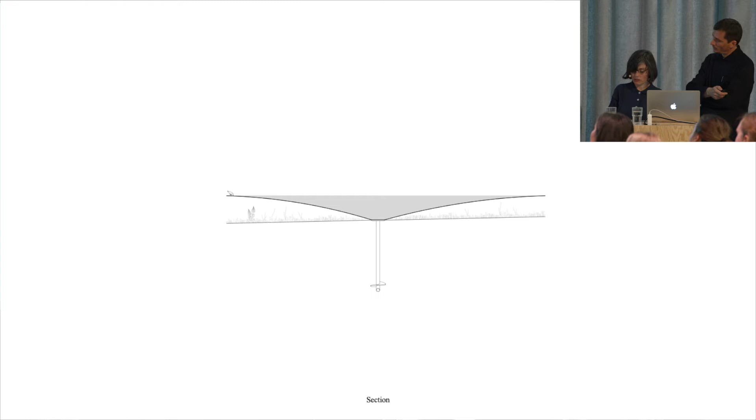We wanted it to be somewhere surrounded by mature trees in the proximity of a path, in an intimate place away from the crowds in the gardens. It should be something one discovers within nature. We wanted the ground to be modified as little as possible, with minimal clearance of plants, leaves, or other organic materials. The intention was to minimize the impact on the site in order to strengthen the relationship of the artificial object with the natural surrounding context.

The form of the basin is a kind of complex double curvature surface, but essentially it's an inverted truncated cone with a circular bottom plane of about 18 centimeters at the base, and an irregular top that varies between 4 and 4.5 meters.

The geometry in plan was determined by its center, which we see here in this plan. So in order to determine the geometry, we divided the shape into 20 sections with a common center and a specific length of varying length. We created a series of arcs that then went to create the whole form.

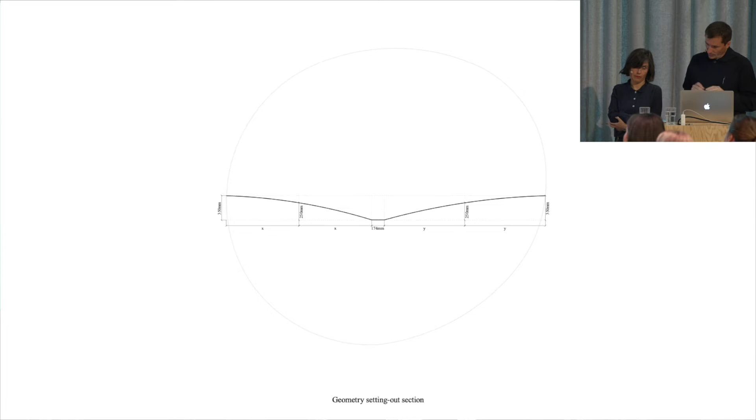It was built, fabricated in the local workshop in Grand Métis. Essentially, what we built was an inverted concave mold, constructed using simple 18 millimeter thick plywood. Then we cut the 20 sections, arranged on a polar array every 18 degrees. Sections of plywood went to bridge the different forms, creating a surface which is this inverted cone.

The mold was then filled and sanded down to a smooth finish, and the basin was cast as a fiberglass single seamless piece. In order to augment its reflective properties and minimize its presence as an object, the entire basin is matte black with pigment integrated directly into the fiberglass. We wanted the blackness to be deep and solid, something we could not achieve with an application of a layer of paint. We wanted the material to be black in its core.

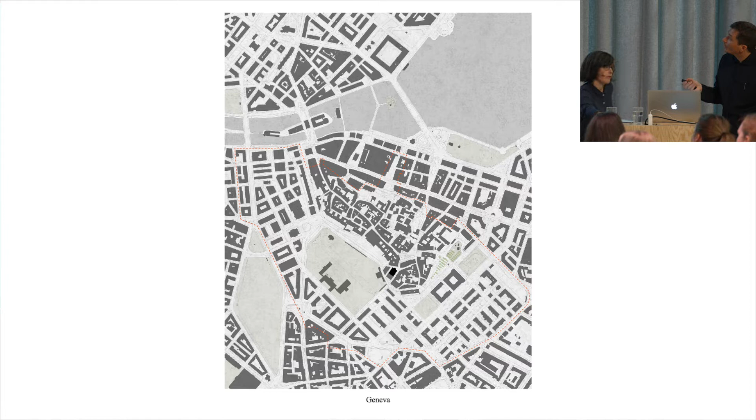It's this darker dot, on the edge of the historic city of Geneva. Another thing we marked in this plan: the red line highlights the heritage protection zone affecting both the historic city and its environs.

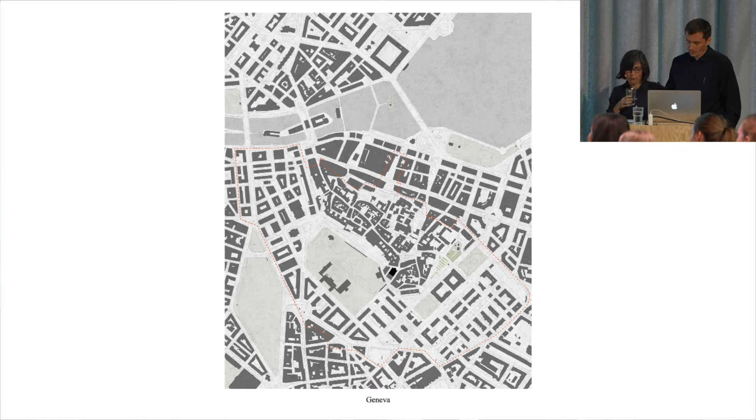So the Ancien Manège is located here at the edge of the city, and in one of the historic entrances to the medieval town.

The building was originally built between 1828 and 1829 as an initiative by the government of the time, and it was built by an architect called François Breuer, and its use was a municipal horse riding hall, mostly used by the military forces.

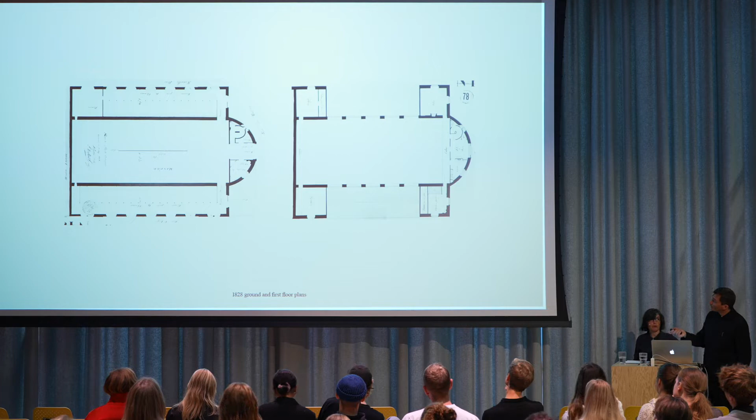So the composition of the building followed what was the canon for military buildings of the early 19th century. We have a covered arena at the center of the construction that is flanked by 2 wings of stables. And then we have this quite singular semicircular rotunda that at the time determined the main entrance to the building and housed a series of services for the building. And then this volume kind of completes the central volume of the horse riding arena.

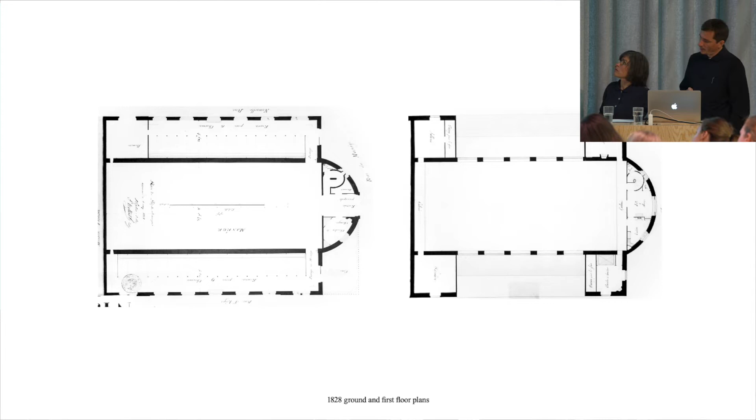Then we see more on the first floor plan. The 4 corners of the building are defined by 4 towers that housed secondary spaces and define the corners of the building.

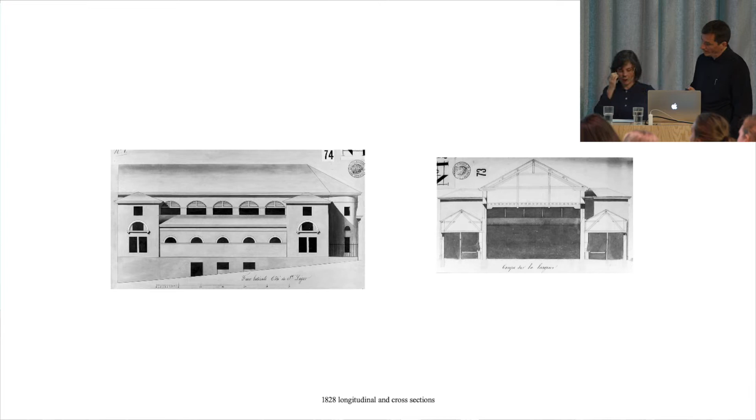Then in the section is quite interesting because we see that the difference in height between the horse riding hall and the stables allowed for natural light and ventilation to enter the central space. And then also these allowed to ventilate a huge loft structure that was used to house the hay for the horses. So those are sections of the building in its original configuration of the 19th century.

But following the increase of the popularity of the car at the time, and the rejection of equestrian activity in the city center, in the 1930s it was first transformed into a garage. At the time it was already called the garage of Bourg-de-Four, in the historic city, and this apparently was the first pump station for petrol in the city.

To further augment the capacity as a parking for vehicles, the building was considerably transformed in the 1950s, following a project by the architect Jean Camoletti. The introduction of 2 reinforced concrete slabs completely modified the composition of the building.

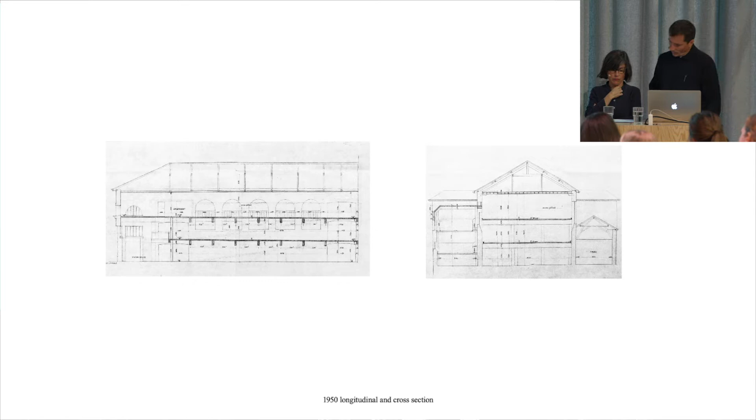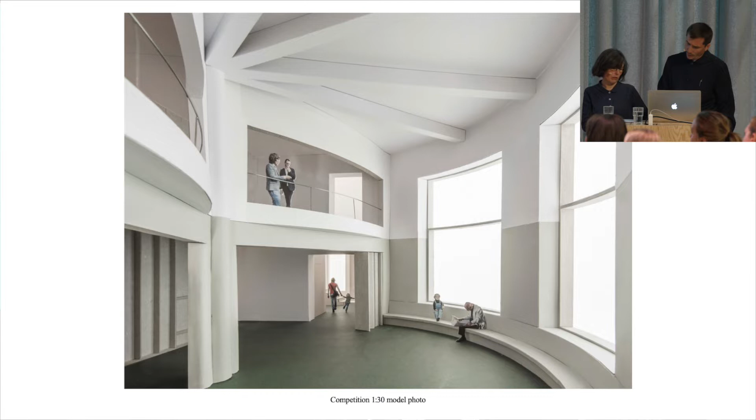This is one of the early competition images for the creche, which was one of parts of the program, a toy library, spaces for the neighborhood association, and also a large space that also became a school restaurant for nearby schools that needed this facility. So those were a series of images that our photographer Andres Fraga took at the time of the competition.

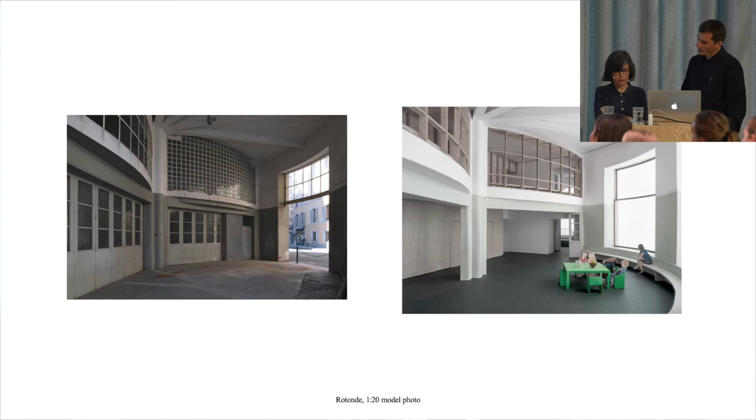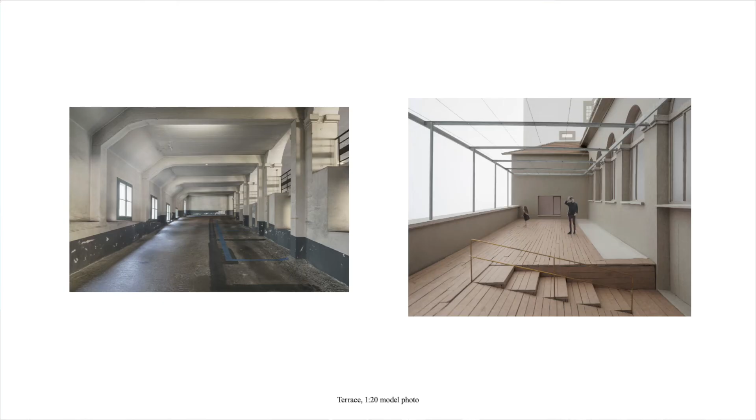So the project, the point of departure of the project is the comprehension of the spatial and construction configuration of the building as found, and assessing its potential to become an inhabitable building with minimum intervention and transformation. So the project proposes the reutilization and adjustment of existing structural and construction elements combined with selected demolitions and punctual repairs and minimum additions with the intention of utilizing the atmospheric, architectural and thermal qualities of the various parts of the building.

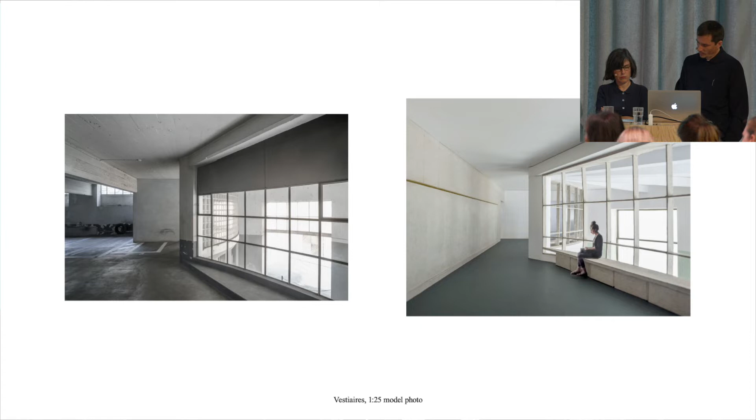Again, here is a series of model pictures in parallel to images before the commencement, the start of the work on site.

As part of the another important part of the project was to redefine the public space and to regain as well the exteriors of the building for the use of the people and pedestrians. The building now is accessed from the rue Julien Pichot via a new pavement that clarifies the urban block, establishing a visual relationship with the Bourg de Four, that is the space with the trees, a square in the old town, the main square in the old town, and the new public space in the proximity of the entrance with this fountain.

The main entrance hall for the public space is placed in one of these towers, Stefano was explaining, on the left side of the building, becoming a double height entrance space where the various construction periods coexist. This is a space that we did semi-external, and we didn't need to insulate, and that allows us to show the stone construction of the original building, the concrete qualities of the construction of the 50s, and then the 21st century interventions.

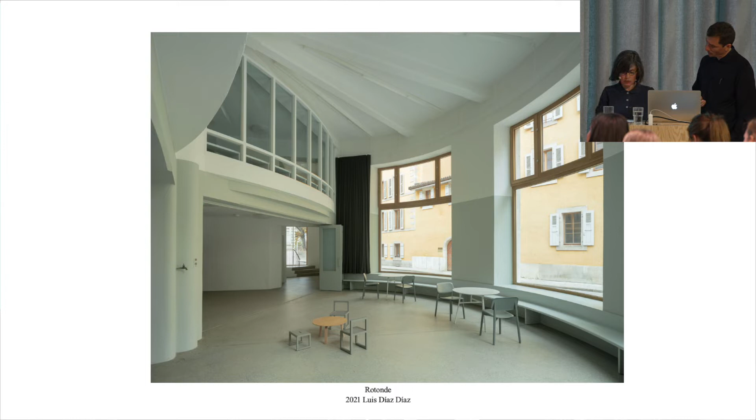Accessing the building from the towers allows for the semi-circular rotonde to become a living room, an urban living room in direct relation with the street, preserving again the 1950s concrete structure and balconies.

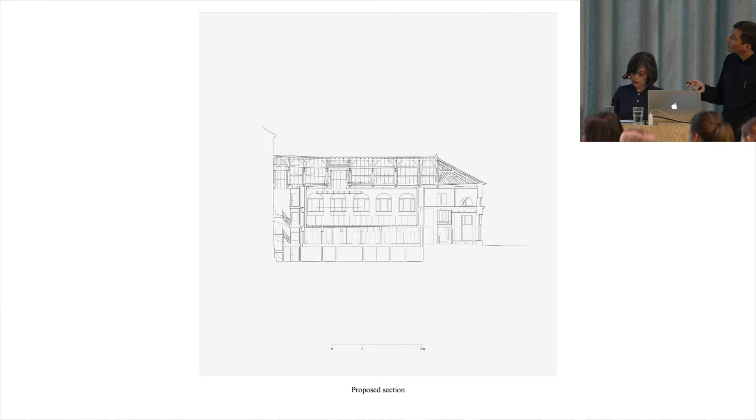The lower concrete slab is preserved, forming a service plinth where all the common services are placed, liberating from obstructions all the perimeter spaces with windows on the exterior.

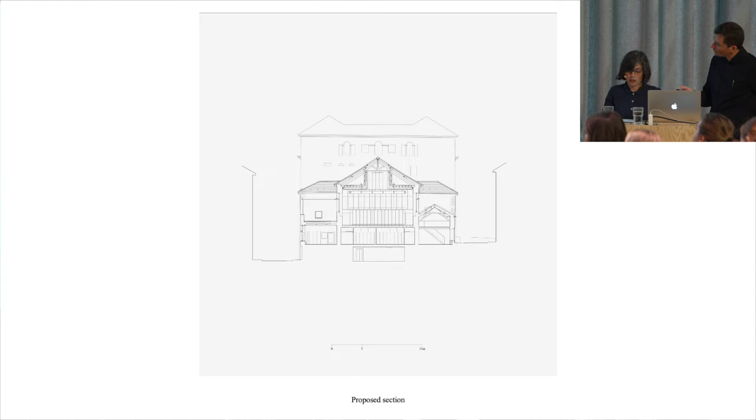The intermediate concrete slab is partially demolished to liberate the large openings and obtain a generous salle, also serviced from the service plinth.

All the new additions are realized, taking the form of partitions that define the large block of services on the ground floor and the two large partitions that acoustically exclude the salle from the rest of the building.

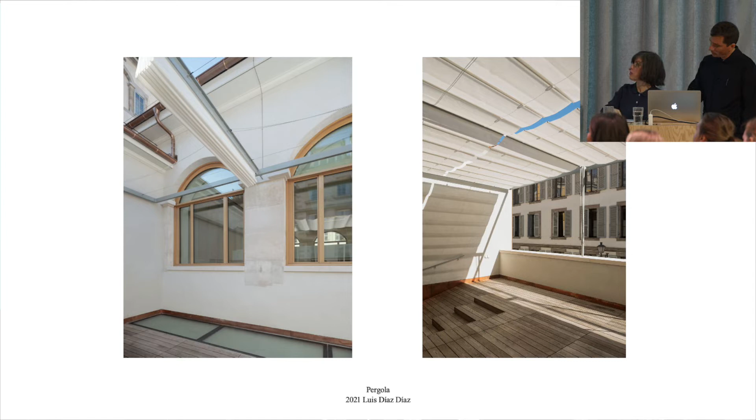The result of the demolition of the higher volume in Rue Saint-Léger allows us to do the only new structural addition, this new roof over the south wing that forms the crèche, and becomes a new terrace on the upper level, protected from direct sunlight by a pergola that also gives some protection into the interior of the salle.

In order for the salle to be occupied by multiple users simultaneously or used as one large room for special occasions, a suspended structure can be lowered or lifted to form a partially separated space within the salle.

This element is hung from the existing timber structure and lifted via a central skylight that also provides natural light and ventilation to the salle.

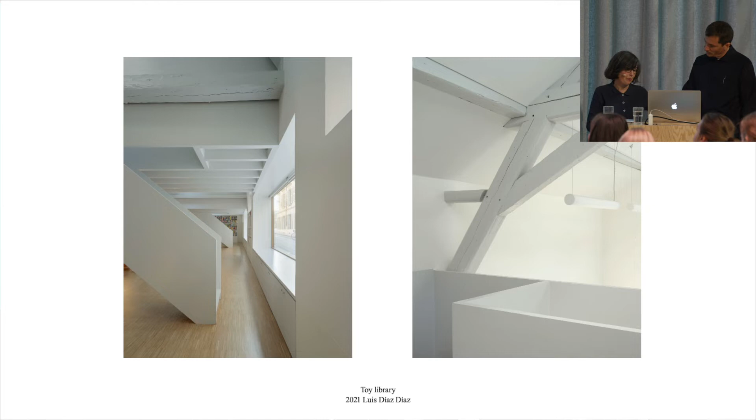So the project, one of the ambitions of the project was to try to make compatible the optimization of the thermal envelope of the building and the conservation of the original qualities of the structure.

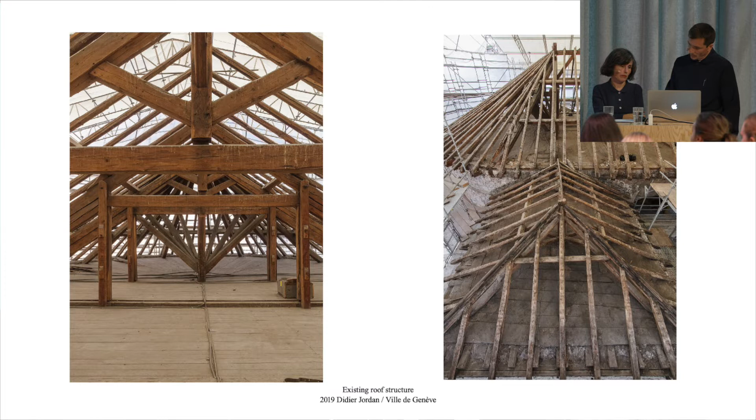In order to minimize the intervention into the existing timber structure of the roof, we maintained the insulation barrier below the structure, which allowed us to preserve and maintain the structure in its entirety without modifications.

New insertions in the building have different ways of dealing with the existing structure. There is a series of more stereotomic, mineral interventions, which we see in this case made with kind of Ytong insulating blocks, or on the right, carved stone, which these interventions go and complete and try to reassemble somehow the lost clarity of the existing building.

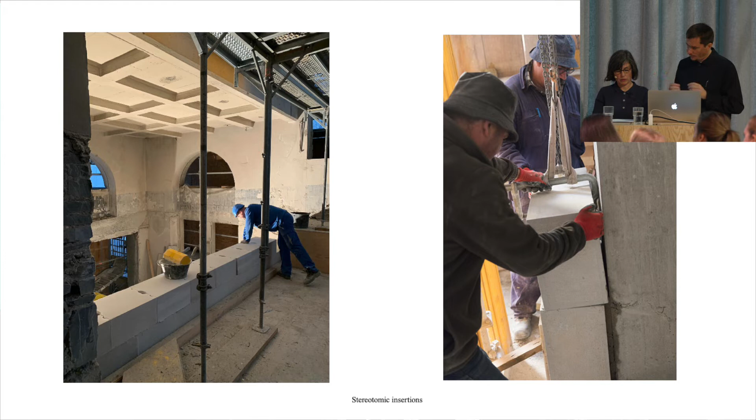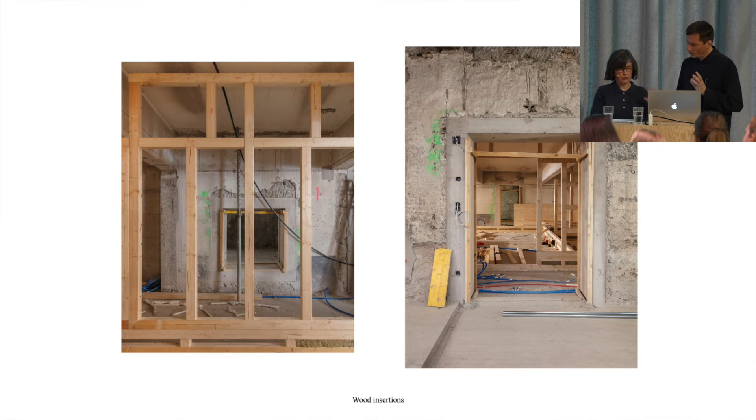Then there is another kind of layer, made out of wood, utilizing wood construction and a kind of light construction that is more related to the current use of the building, and an idea about possible modification in the future. So there is a kind of dichotomy between permanent and non-permanent interventions.

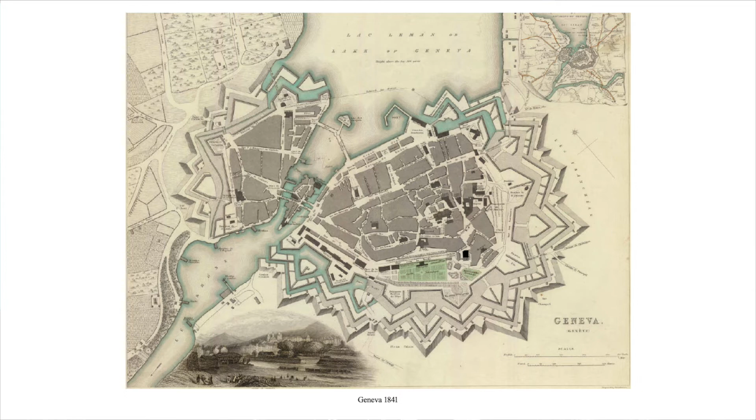In this plan of 1841, you can see the city of Geneva still fully enclosed by fortifications that only 10 years later started to be removed to give way to the 19th century expansion of the city. The Bastion Saint-Antoine is placed here, you can see the Manège was already built there, and the Bastion Saint-Antoine is on the east side of the historic city.

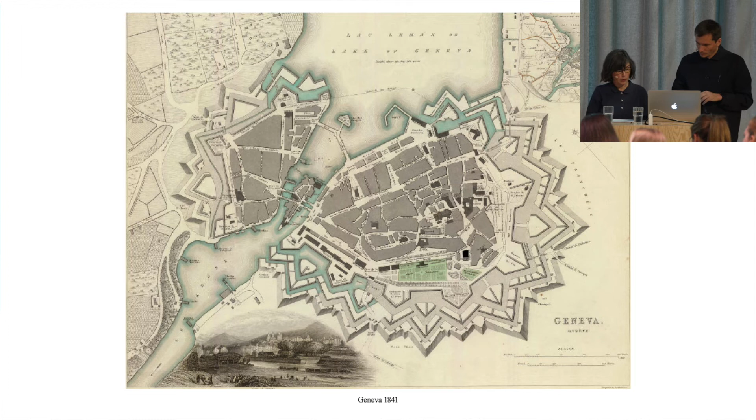In this print from 1841, earlier than the plan, you can see the city of Geneva, the view from the Bastion towards the lake in the background, and the fortifications still in place. It depicts this end of the Bastion as a public space, with kids playing and people using it as an urban balcony.

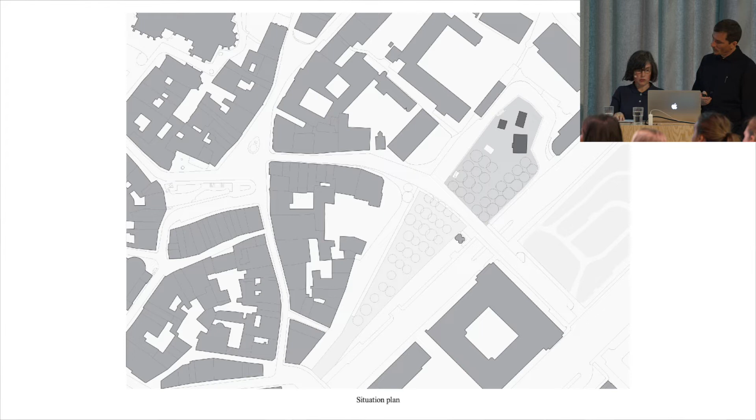Located near one of the gates into the historic city, the ensemble of both the Promenade de Saint-Antoine, this long promenade, and the Bastion of Saint-Antoine form one key public space for the historic city of Geneva nowadays.

The Bastion was an archaeological site between 2012 and 2015, and the excavations enabled the discovery of first century Gallo-Roman remains, next to a church and a necropolis of more than 300 tombs dated between the 9th and 12th century, and sections of the 15th century fortifications that were then readapted.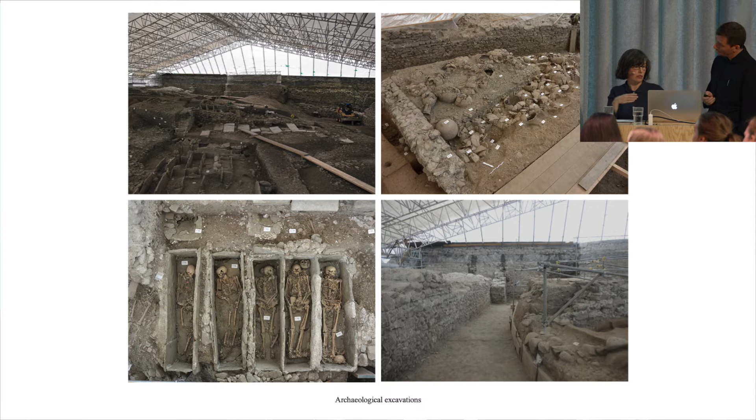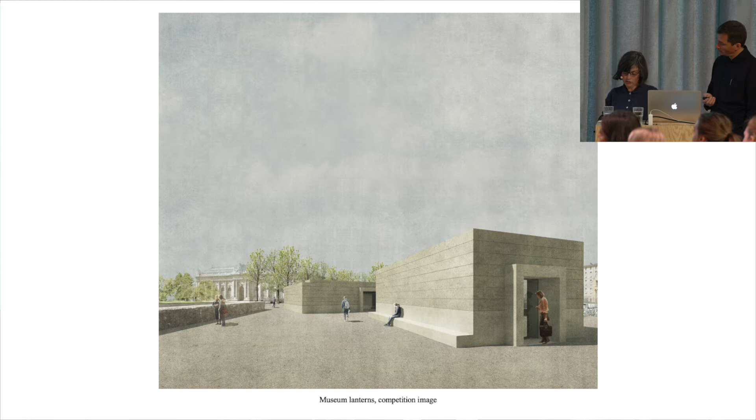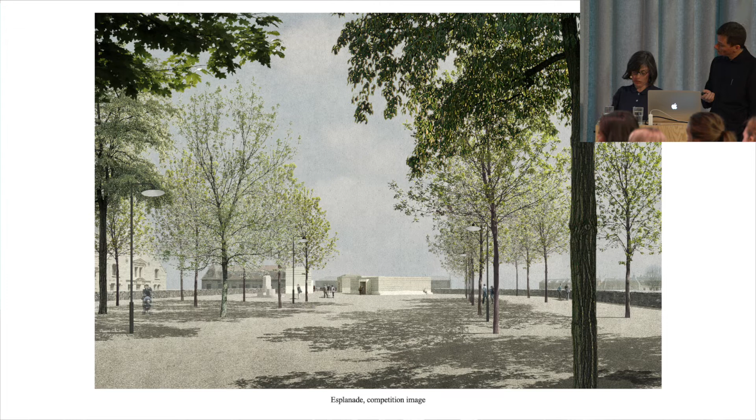The point of departure of our project is the comprehension of the Bastion, of this public space, as an open public space entirely accessible, maintaining its condition as an urban balcony.

The esplanade is conceived as one large surface where various objects are placed: 2 geometric groups of trees, a series of small volumes for the museum, and an existing fountain that we maintain in place.

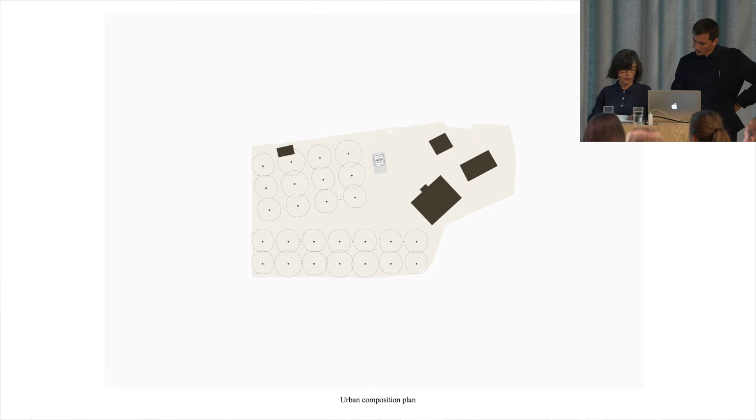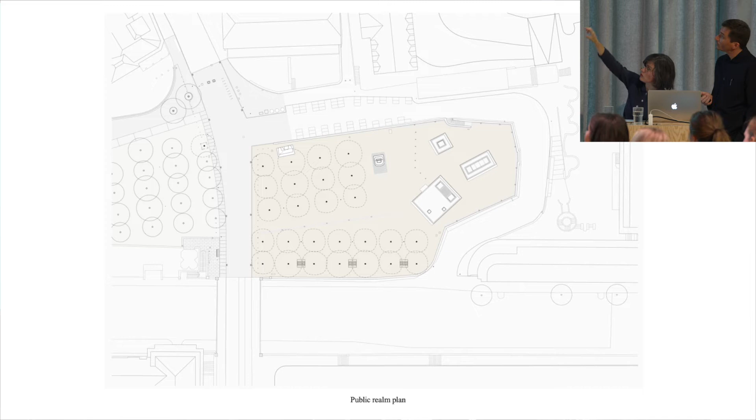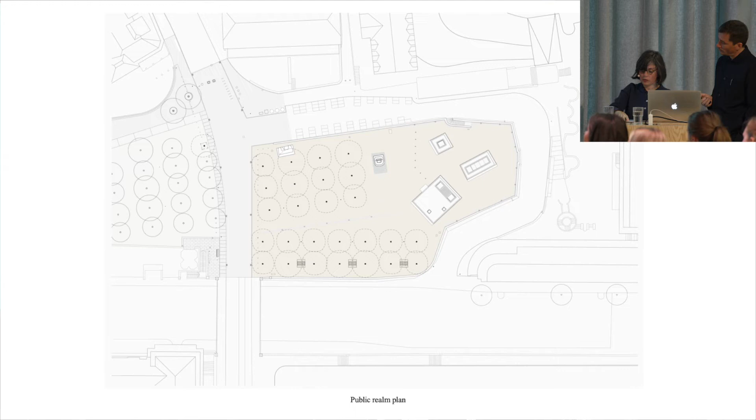The rectangular group of trees above, more squarish, is a continuity with the ones in the boulevard, the Promenade de Saint-Antoine, while the long, more linear group at the bottom relates more with the wall above the boulevard below. Both the existing trees in the promenade and the new ones redefine the entrance, a new entrance for the historic city.

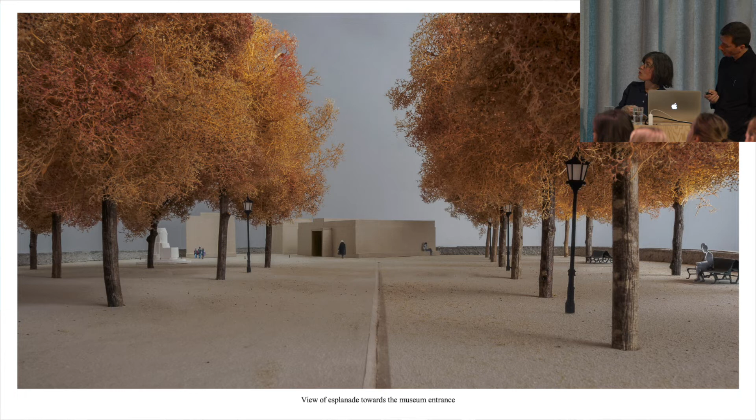The opening resulting from the geometry of the 2 new proposed groups of trees marks the access to the new museum at the end of the esplanade, which continues to function as a belvedere, as our intention was to prioritize the public use of the space and bring the archaeology into the everyday life of the inhabitants and visitors to the old town.

The museum emerges in the form of 3 lanterns, essentially, whose disposition, if you look at the previous plan, seems like an awkward position between them. But the reason they are positioned like this is that they are directly linked with the remains below, so the disposition is directly linked to the archaeological remains.

This small one brings light to the 1st century Gallo-Roman remains. Then there is a second, more elongated one, which follows the geometry of the found church of Saint Laurent, and also brings light to the coffins and skeletons we saw in the previous image.

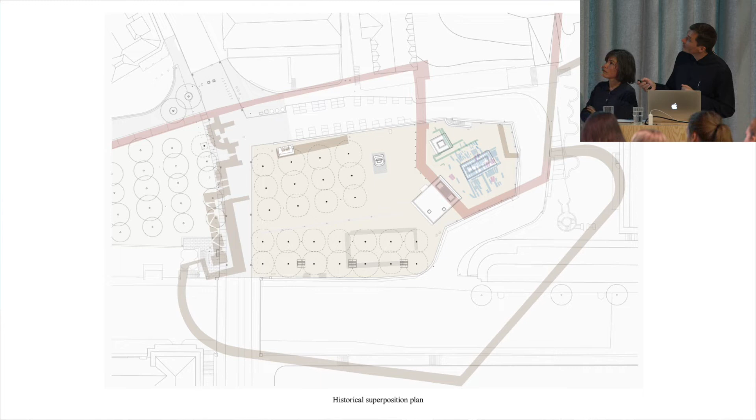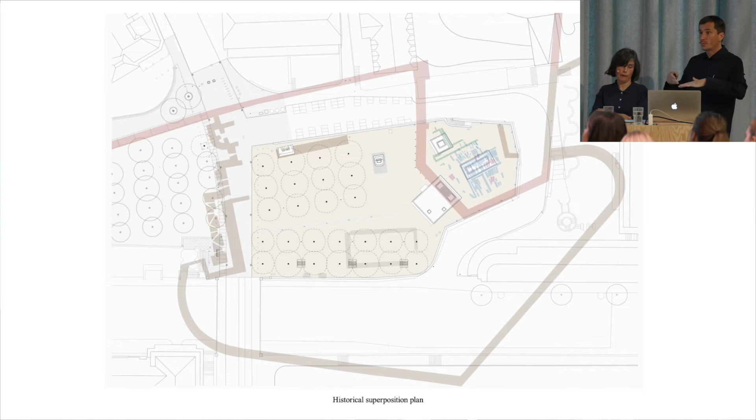Then the larger lantern sits tangent to part of the 15th century fortifications here, and there is another element which sits in relationship with another portion of Renaissance fortification. This is a plan we developed early on in the project, a historic superposition of the layers below, some of which still exist and some of which don't, that helped us determine the geometry and position of these lanterns.

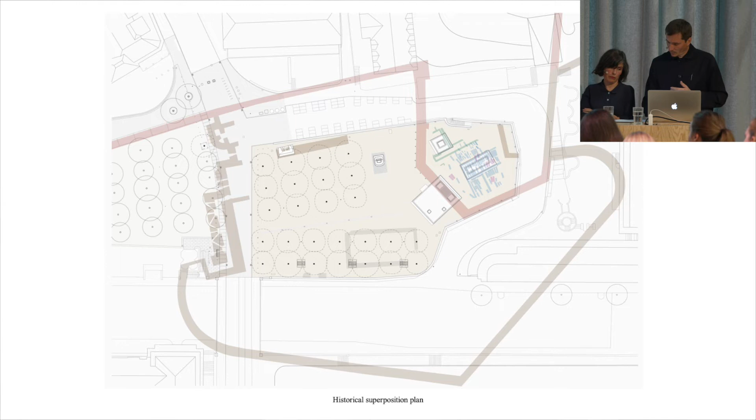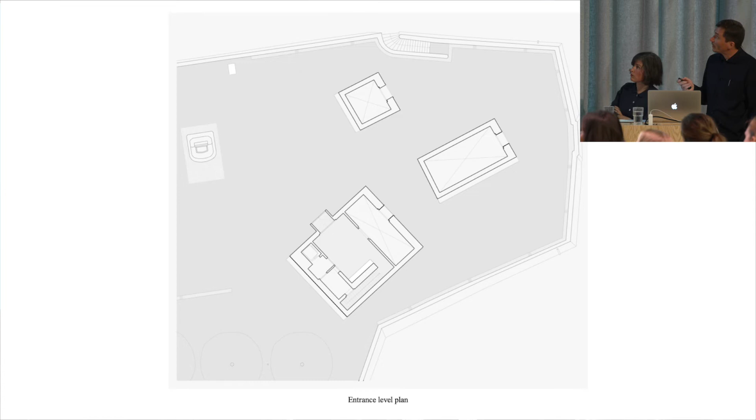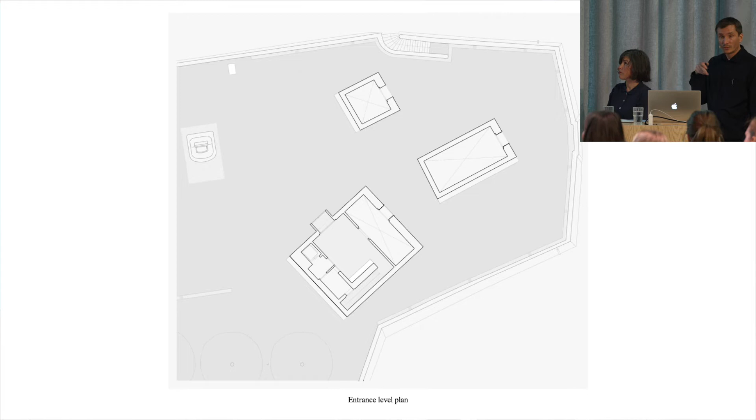This is a plan cutting at the entrance level of the museum. We see that these two lanterns are essentially two voids, just two buildings whose function is to bring natural light down to the museum. They also have a window that allows the public to see parts, fragments of the archaeological remains.

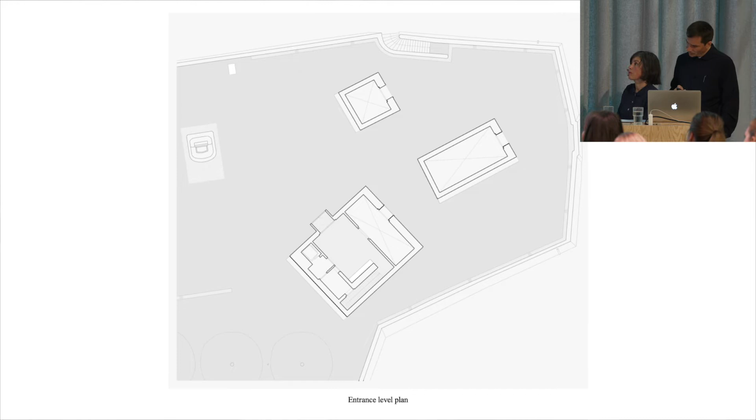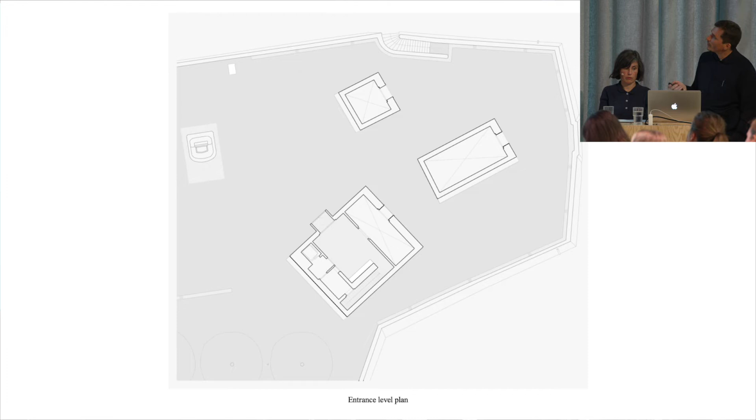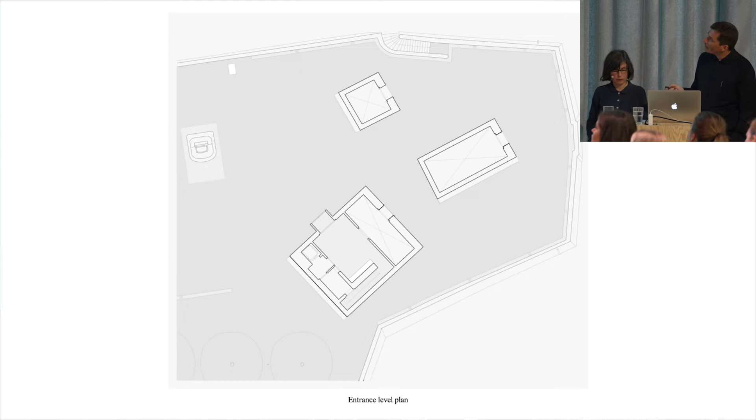The larger lantern provides entrance to the museum, with a small reception space for someone giving tickets and allowing visitors in. Then a long and narrow stair leads you down, and a lift for reduced mobility users, and there is a big void that allows glimpses below.

So the lanterns become at the same time urban elements that define public space, with a bench and their own building construction, belonging to the public space of the city. But they are also complex devices that allow for natural light, controlling it to light the archaeological museum below.

So we liked this idea that the lanterns become this manifestation of the presence of the remains in the city, in the daily life of the city, and then these carefully placed openings allow for the general public passing by, with their dog, to look down and have a glimpse of the remains.

Then the museum itself, it's an experience that has to do with these fragments that you see from the public space, and then the visitor, with a ticket or on demand, can access the entire building and then one sees the ensemble of the remains.

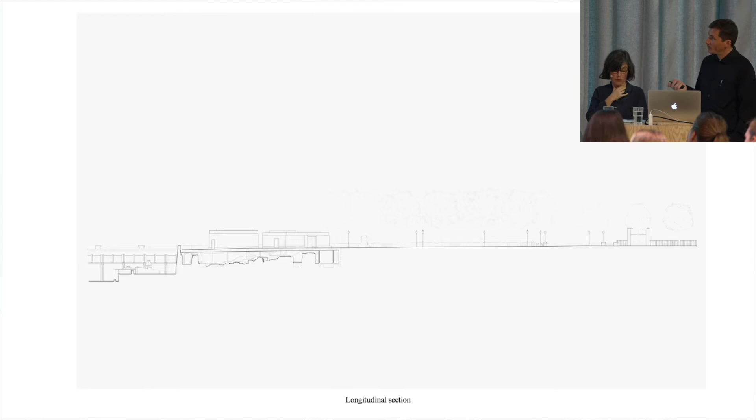So the lower level of the museum is just one single space where all the remains coexist, one next to each other, under this large, long slab that is the extension of the public space, just perforated punctually by these lanterns that bring natural light down to the remains.

This section in particular is the one that cuts through the first century remains, and shows how the lantern relates geometrically to it.

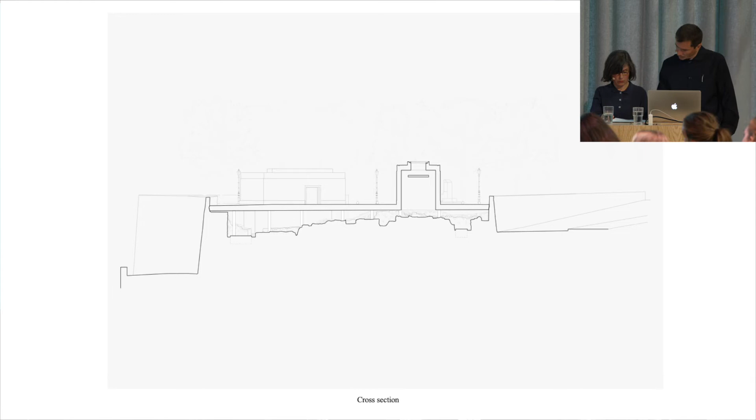So the museum is accessed, as we saw in the plan, by a small entrance hall. It's just a room that allows visitors to enter, sit down on a bench, and acquire a ticket, and through this window they also have glimpses of the remains below.

This is a 1:20 model that Gonzalo worked on, depicting the process of going down from the small entrance to the space below. At the time we worked quite carefully on a kind of light transition from being outside to an interior space, and then going down, so that the eye needed time to adapt—the pupils needed time to adjust to that change in light. So the stair is this kind of device that does that.

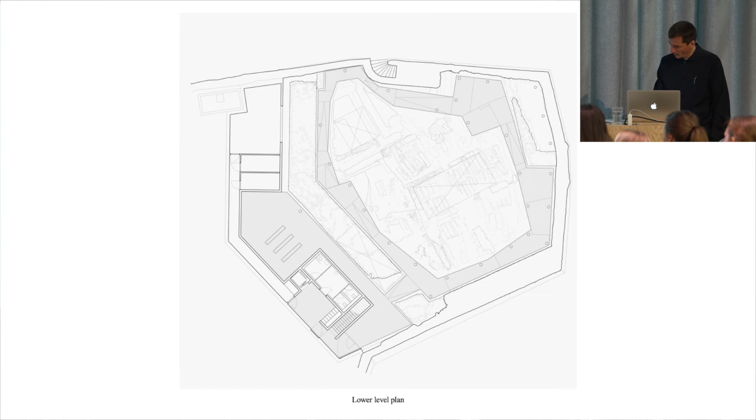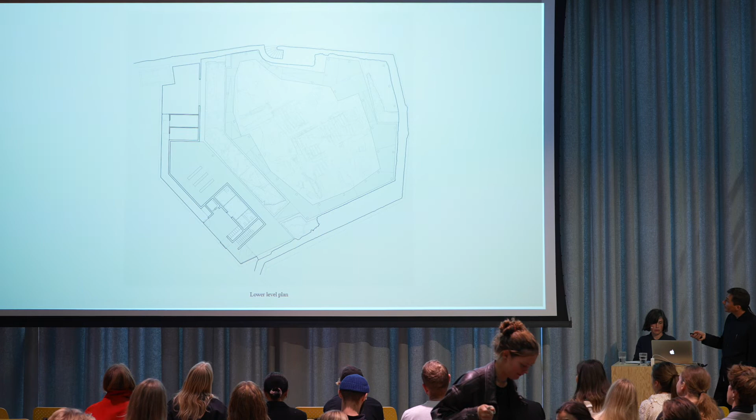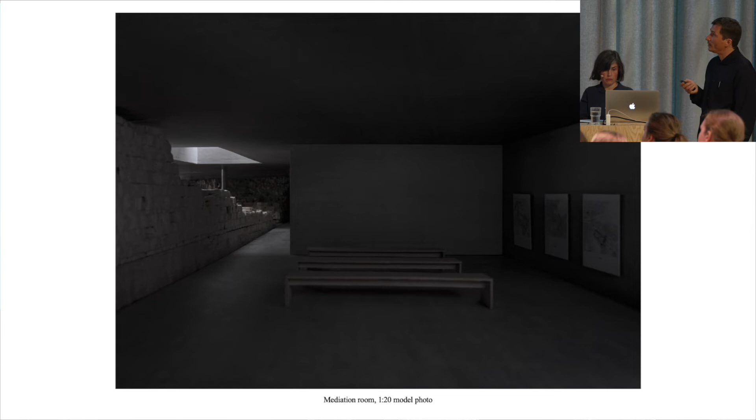So this is one of the spaces that results from that—the space we saw in the plan here. This is the space where groups or classrooms can gather. There may be a projection or elements that integrate the museum visit, and then we see here the natural light entering filtered through the lantern.

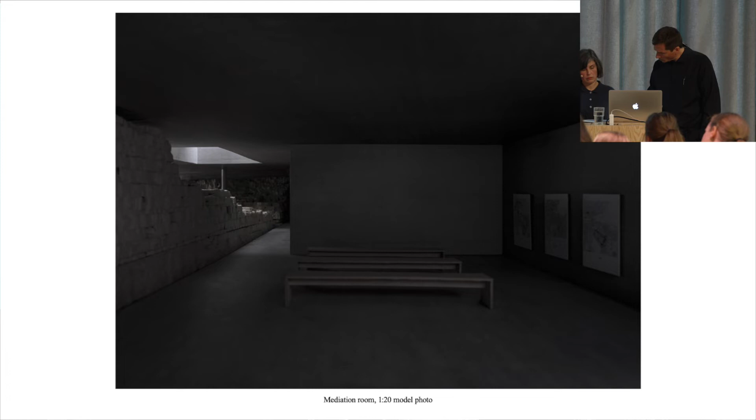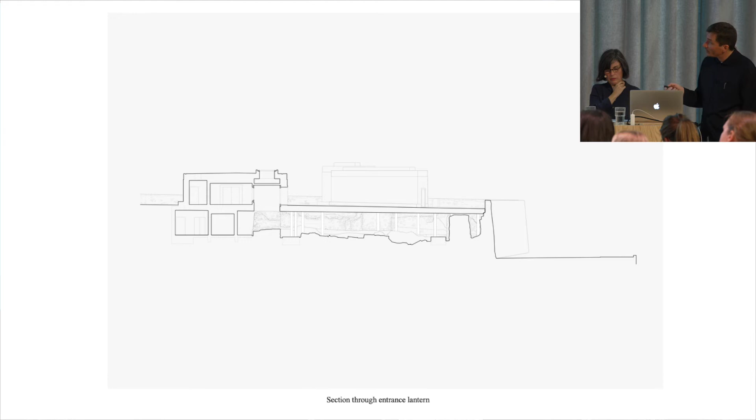So this was the photograph of the model, and this is the section depicting how that lantern works, bringing light down to the space.

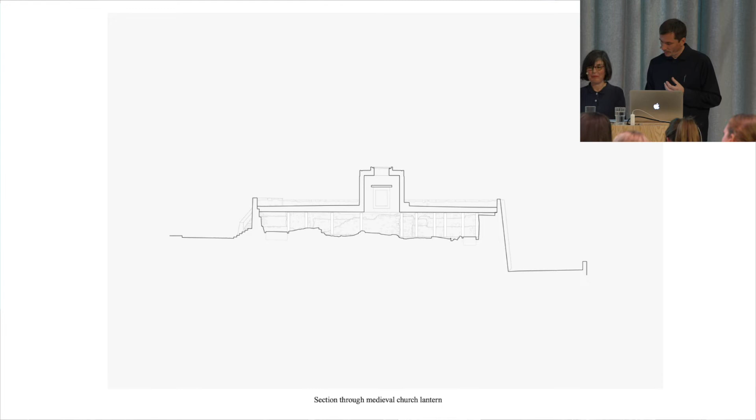Particular attention was given to the position and design of the openings of the lanterns, because there was this kind of dichotomy: the project really is born from how to bring natural light to the museum, but at the same time we have to protect the remains from direct light. So we had to work very carefully on their positioning and how precisely to control the light for this museum experience.

So these are a series of drawings we did in the project phase, in which we explore how all the windows of the lanterns face north. This is the angle of the light in the most negative scenarios for us in terms of direct light, so we see that light is always coming at an angle and never impacting directly into the center of the space.

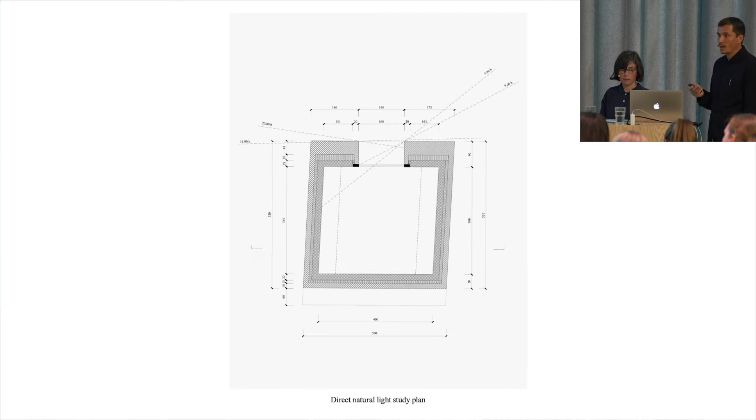And then also we explored the position of the glass. There's a big effort in terms of bringing the facade, the insulation, and the glazing back to the internal face of the lantern to reduce the glare in the glass, so people can really see below.

This was weeks and weeks of work to determine this. So we see that like the lantern, we have an opening at the top with natural light, also still in the various angles. Then there is a slab, another concrete slab, part of the structure which is just below. And this allowed us to create a kind of light chamber.

We like to call it that. So this chamber allowed for natural light to enter, bounce off, and then diffuse on the sides of the lantern. And this kind of chamber also allowed for artificial light to be introduced, so then we could never really see where the actual light is coming from.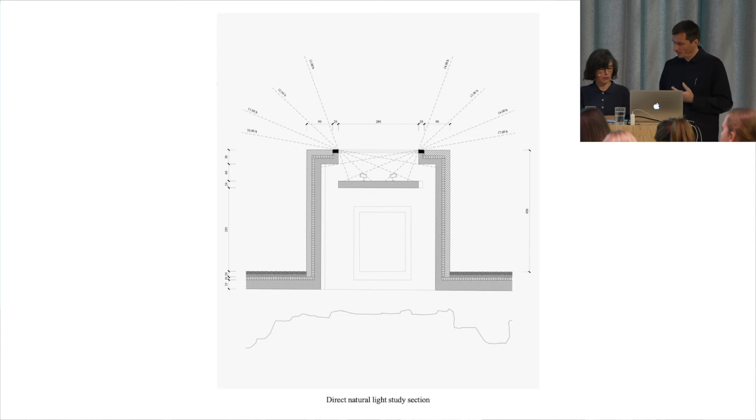That resulted in this idea that light in the museum would be always the same: day, night, summer, winter, autumn. So almost like time has stopped, and there is a kind of continuum between this idea of light and space, that almost we have stopped the time, and all those remains kind of coexist, almost frozen in time.

Another difficulty was that as the actual building substance of the Bastion was part of the exhibition, part of the exhibits, we couldn't really insulate normally as you would do in a building, where you have a kind of insulation layer on the inside.

So with the physics engineers, we developed this strategy where we consider this space as a semi-external space. It's not an interior. That allows us to just have a minimum thermal insulation applied on the slab here, and then also the lanterns include thermal insulation.

This insulation is only needed for the space not to freeze in the winter, and then not to get too hot in the summer. So it kind of fluctuates between 12 and 18 degrees, maybe 20 in the summer.

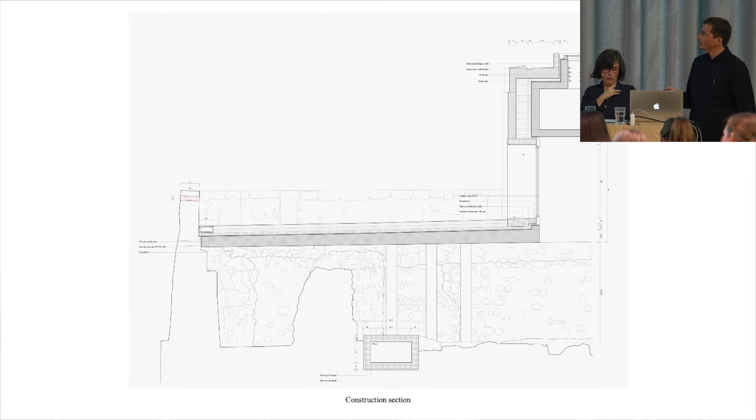But for the person working there, we needed to guarantee an inside environment. So the only technically insulated space, or technical interior, is this room here, which is the room for the person working in reception. And then these spaces start to become already kind of semi-external in their treatment.

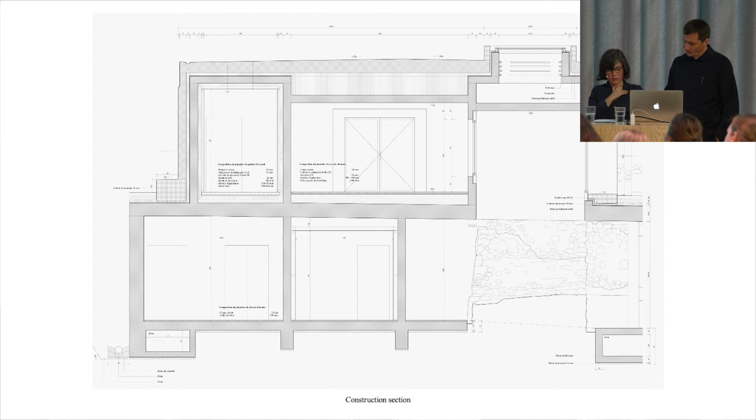Those are some extracts from our construction drawings. So the result is this technically semi-exterior space that is kept from freezing, as we said.

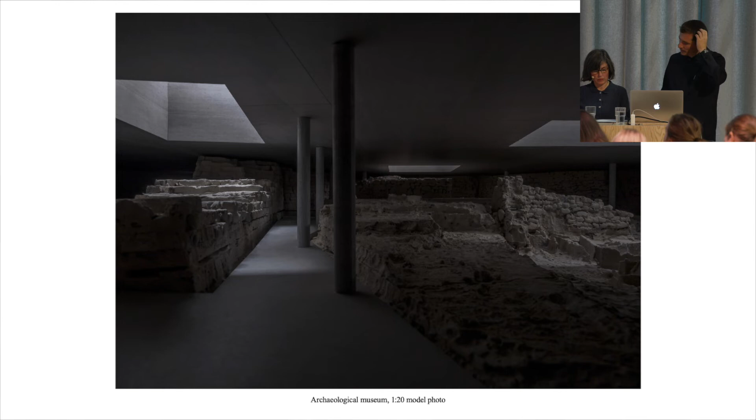To explore the raw spatial qualities of this museum, the density of the natural light created by the lanterns, this kind of cold and almost damp atmosphere of the museum, we built this huge 1:20 model of the entire building that was photographed by Andres Fraga, who is also here with us, with only natural light. So these images we see here, it's essentially a physical model that was photographed with natural light.

So in here we depict the museum sequence we are seeing. This image below shows the three lanterns, how they coexist in the space, and then we have glimpses of the medieval remains, the Roman remains at the top, and then how this soft light catches the geometry of the Renaissance constructions.

Then we're turning around and we're seeing the tombs within the space of the church. Again here we see another of the images, walking around the perimeter. There is a space to go down and get a bit closer to the remains.

So really the intention of our lecture today was to present to you our way of working with natural light as a raw material, a physical material that is constantly changing and constantly reacting with what is around it, and also affecting our emotions. Thank you.

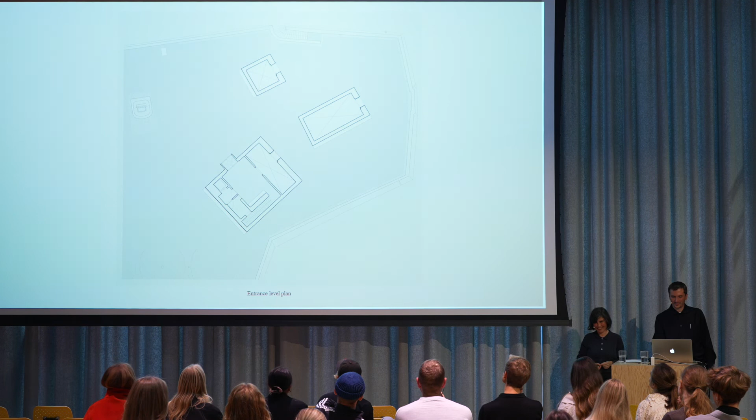In the second project with the horse saal, I noticed it was all white — all the constructions were painted, all the layers. The honesty of the building was removed in order to paint it all white. Can you tell me the arguments for this choice of removing that honesty, so to speak?

That was a big debate we had at a certain moment with the client — when we had all the materials, the stone was stone, the wood was wood, the concrete was concrete. But that was something we explored quite early on, from the beginning of the project, and it evolved more through the phases. We started exploring paint as a material itself, not just something to cover things with — paint can be matte, paint can be shiny or gloss, so it becomes a material. When you start thinking that way, you also start questioning things.

Maybe the authenticity we see of materials, that rawness, sometimes isn't so truthful, because concrete sometimes is actually painted to protect it, or wood. So here the main intention was that we wanted all the historical phases - 19th century, 1950s, also some 1980s interventions, and ours - to sing and talk to each other at the same level. Paint as a material helped us bring down the tone of all these parts, so they start to coexist with each other. Then the subtleties are more about texture, the quality.

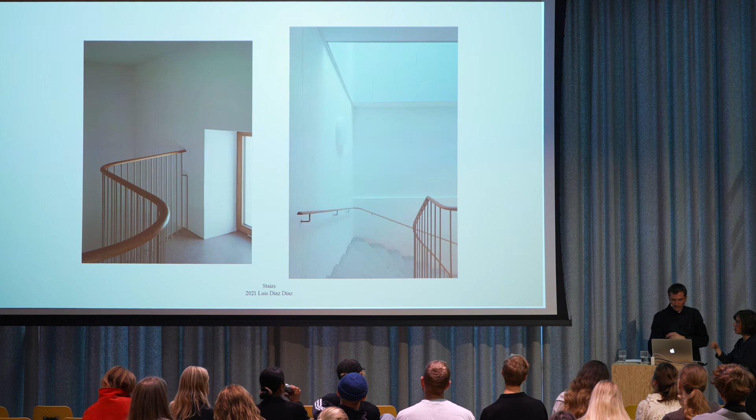So it's not trying to hide anything. You see the old timber there, for example, in the ludothek - you see all the cracks and how it's open and how it's timber. While the new one, there was another image here, it's completely smooth, and they were painted the same color, that is a gray, and it was a bit glossy. It was a paint for timber.

While the ones on the wall is chalk paint. It's chalk paint that allows us to keep the walls ventilating, and it helps for some qualities of the space. But there are a lot of subtleties in there - it's not all white. Then in here you might not notice, but the idea was that we were doing a ludothek for this space for today, and it was just one space. We felt that the building was so different, all the rooms were different. The people that were going to use them are different entities that needed to coexist, and somehow this white background was the thing that maybe unified the building as an entity.

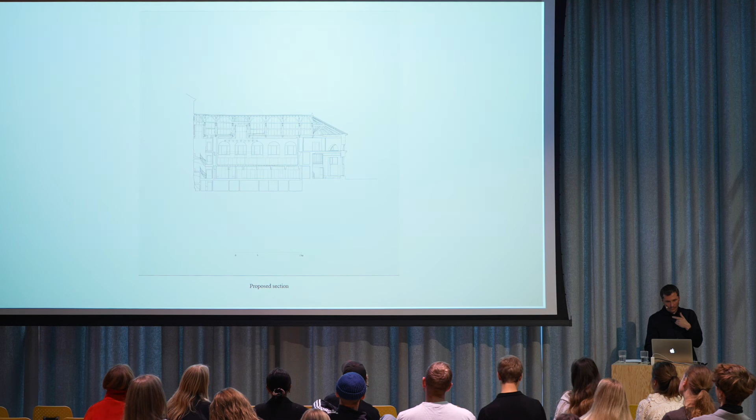But then also going back, maybe in Saint-Antoine it was more an idea of blackness, which is the background, then elements that highlight, then this kind of neutrality, and then these sensible variations of the textures of the existing concretes. Then there is a counterpart, which is these polished terrazzo floors, and the ironmongery, and also the handrails that build up from that neutral layer.

Then to go back to the Manège: we took these pictures with David Grandors at the beginning, because the users and us as well, we were very much in love with the existing building as it was. So we went through trying to understand, maybe in those pictures where Stefano showed the existing building and then our proposal, and it was a work of trying to recognize all these colors that were existing and bring them into the building somehow.

So we collected them because we thought they mark the character. Even though in the picture of the model it doesn't look like the gray there, it's the same gray we painted the final room. Somehow now it has much more light inside. I don't know why, because we reduced the size of the windows. But anyway.